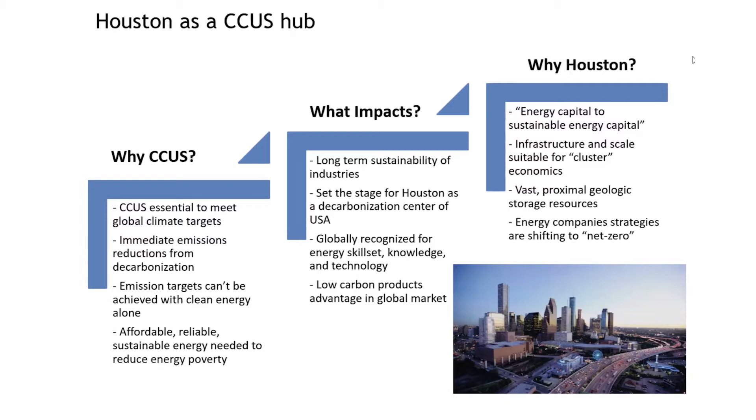So as we go forward, what were our objectives and findings? Well, we looked at a staged three-by-ten-year deployment: an activation phase, an expansion phase, and a broad deployment phase, looking at them in ten-year increments.

And we used the National Petroleum Council construct that has recently been put out to actually look at broad commercial deployment. We analyzed not only the emissions impact, but also the economic investment impact concurrently. And we're looking at CCUS optionality in terms of our geologic formations and what we have to offer in terms of enhanced oil recovery, storage, or both.

Our findings were such that the investment and risk hurdles really tell us that it will require strategic investment. It's going to require a mixture of enhanced oil recovery and pure storage in terms of our investment portfolio, but it affords us an opportunity to have a positive return at modest hurdles.

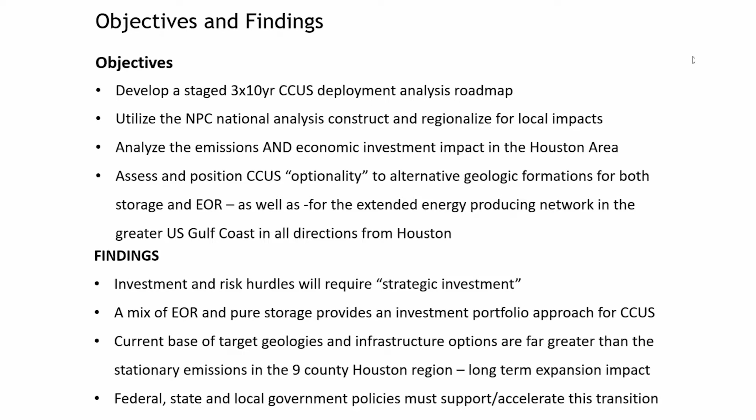And the current base of target geology and infrastructure here in Houston is far greater than our region. It impacts not only beyond into Louisiana and south and west of Houston, but also can be very important for our national program. As such, federal, state, and local government policies will be required to support this transition.

We looked at the three areas of capture, transportation, and storage, and we have challenges in all three areas, there's no doubt about it. But we also have the best position here in Houston to address all three: carbon capture in terms of leadership in world technology development, with entrepreneurs here in town driving forward every day, and pipelines, a way of life for us down here, as we continue to look at ways of building out our system.

And of course, storage, not only for enhanced oil recovery, but storage. We have vast reservoirs where we can be recognized globally as really unmatched in terms of storage capacities.

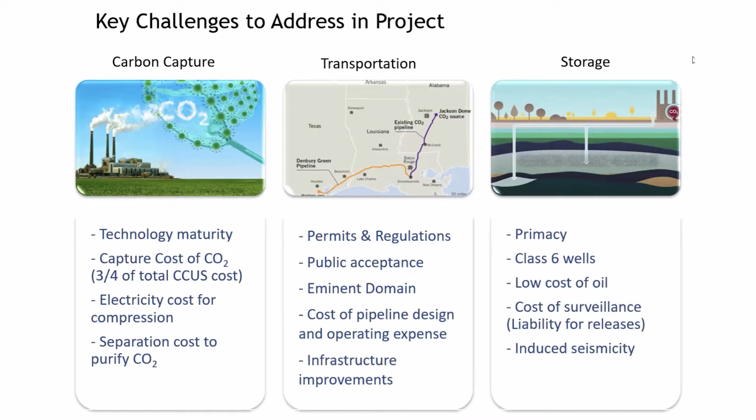As we looked at the Houston area, we looked at it in three phases: activation, expansion, and net zero. On the bottom axis, we looked at the individual processes where CO2 emissions were coming from. We looked at the low-hanging fruit in phase one, then expanded from steam methane reformer hydrogen production and natural gas combined cycle power plants, into industrial emissions and other process challenges, ultimately driving to emissions reductions across our region.

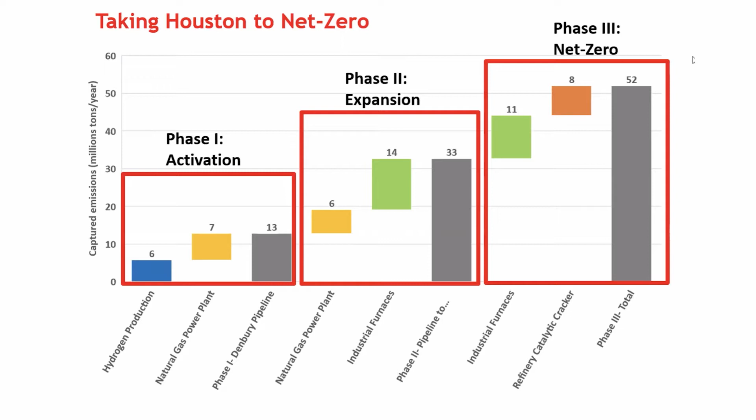But it's really not just our region, it goes beyond that. You'll see how we expanded these three phases in the next chart.

In the activation phase, steam methane reformers and natural gas power plants are located very close to the existing Denbury pipeline infrastructure. Hydrogen emissions were prioritized because steam methane reforming is the most cost-effective way of attacking emissions. Natural gas power plants are second on the list because of their proximity as well.

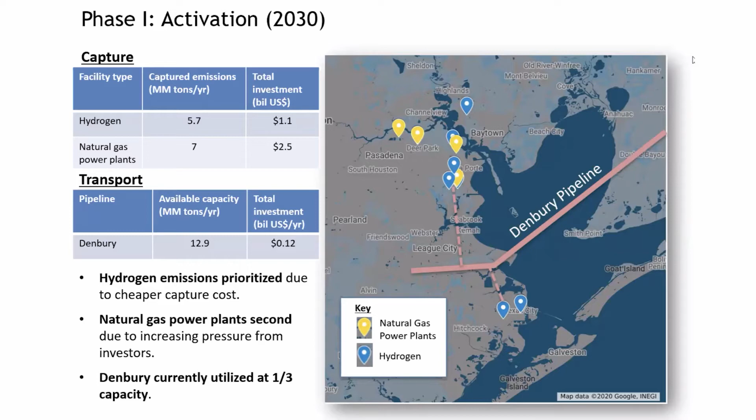The current Denbury pipeline is only at 1/3 capacity at this moment. So we have an opportunity to activate rapidly, installing capture facilities close to existing infrastructure, and having that infrastructure enable the first phase of our activities.

As you see on the next chart, the Denbury pipeline extends east into Louisiana, up into Mississippi, and along with the enhanced oil recovery targets already identified along that pipeline, we have a significant amount of not only EOR storage, but also saline storage.

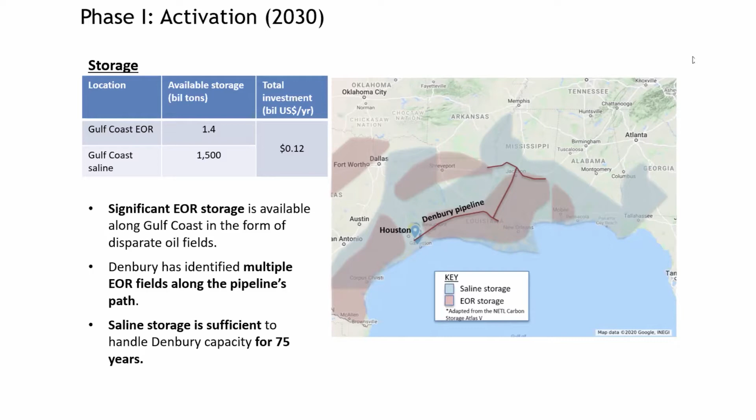So as we look at the ability to activate and move rapidly with capture installations, we can utilize this existing infrastructure and begin to move fast. We need to impact in terms of volumes, but also speed. The previous comment about winning slowly - this is our opportunity to win fast. That's why we focused on this activation phase.

We then modeled the activation phase, looking at it in terms of a 20-year cash flow analysis, looking at the NPVs and IRRs that would come from a project such as this. We used assumptions from the National Petroleum Council and the Gaffney-Cline work provided to us for regional gas and electricity costs and the cost of capture installation. We started with a baseline discounted cash rate of 12% on an all-equity basis as a starting point, which was what was done in the NPC study.

We looked at a multiple series of scenarios, starting with 100% enhanced oil recovery, moving to 100% saline, and then the optionalities created by having a portfolio of EOR and saline. We believe that looking at it this way gives us an understanding that the returns and the investments are all part of this analysis - it's not simply just gathering up the emissions.

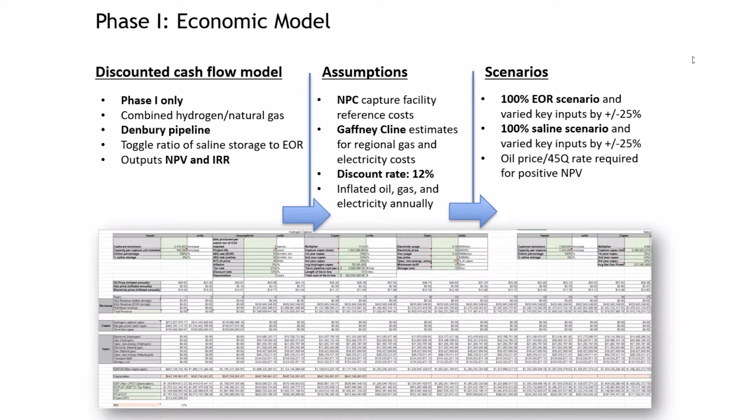From this model, we came up with key sensitivities in terms of oil price, oil recovery, and installed capital. We see that the project NPV can be positive today with enhanced oil recovery applications, but it hinges on the fact that oil stays at $40 a barrel. And that's a risk - that's part of the sensitivity analysis as well.

The oil price, the recovery factor, the natural gas, CapEx, and 45Q credits that go to the project - the beauty of the model is not the answer you get from one particular analysis, but the ability to take multiple variables, move them into this model, and create a future state and set of scenarios where investors can look at it. That's investors throughout the value chain of capture, transportation, and the geologic areas for enhanced oil recovery.

We're excited about this model because we think there'll be a lot of use for it going forward. It's not perfect, but it will set up a construct for us in our region to look at, and also for others outside our region to begin looking at how the geology and natural advantages we have in this region can be utilized - not just for the Houston economy, the state of Texas, the Gulf Coast, and really beyond that.

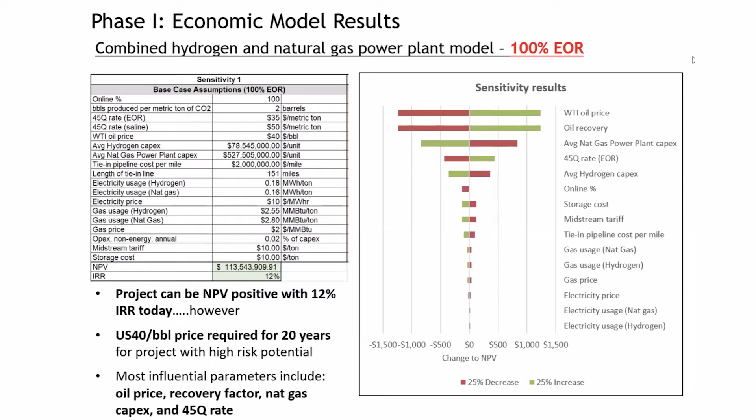So we've modeled a number of different other phases. Phase one, also we get into phase two where we expand beyond that initial phase one construct. We move into phase three where we, again, those three levels of capture.

But I guess the point here is that as we continue to expand, we're doing it with our eye on the future, not just for Houston, but creating that infrastructure long-term to serve the greater state of Texas and the Gulf Coast. We have unmatched geologic capacity in our region. We have unmatched capabilities in our region in terms of companies that are looking to decarbonize with capacity and capability, the scale and the wherewithal to do this, and a place to attract the knowledge and the understanding for us to be viewed as a global center for CCUS deployment.

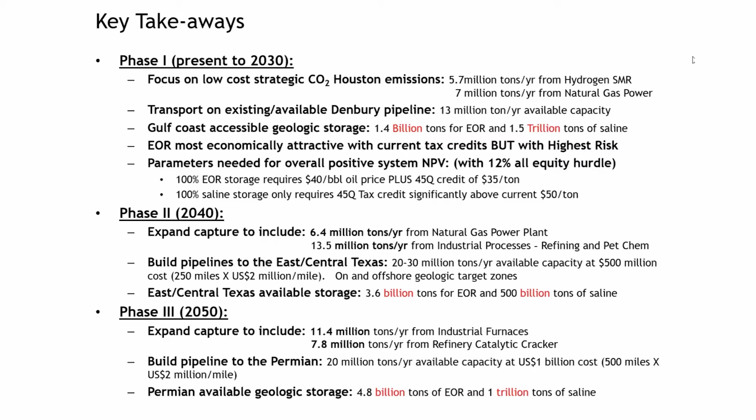Could not agree with the previous speaker more. If you can't do it in Houston, you can't do it anywhere. So we'd like to thank, again, the contributions from Jane Stricker from BP and Mike Godec from ARI and Steve Melzer out in the Permian Basin, Scott Nyquist, and also Nigel Jenvey, especially from Gaffney Cline. The Gaffney Cline cost model was fundamental, and the work that was done in the NPC study really creating the construct for all of our work.

So with that, let me hand it off to my colleagues, Andy Steinhubl, Greg Bean, and Ramanan Krishnamoorti, who will be presenting today. And so let me hand off to Andy and take it away. Well, thank you very much, Chuck.

Brett mentioned that today is National Hydrogen Day, and National Hydrogen Day was in fact established to raise awareness of the benefits of hydrogen. And I can't think of a better day to speak to Houston's potential to globalize our leadership in hydrogen. I'd like to recognize the students who are listed on this page who supported the case studies and modeling work, which I'll profile as part of the summary narrative, and then members of the KPMG team who also supported this work.

So if I unpack a bit the notion of globalizing hydrogen leadership in Houston, the market is expected to grow for hydrogen gas about tenfold per the Hydrogen Council by 2050. And if you include equipment associated with hydrogen, fuel cells, electrolysis, the market size by 2050 is anticipated to be $2.5 trillion. And that's being driven by the fact that many countries and regions pursuing decarbonization recognize the importance of hydrogen to decarbonize activities that are beyond the practical limits of electrification.

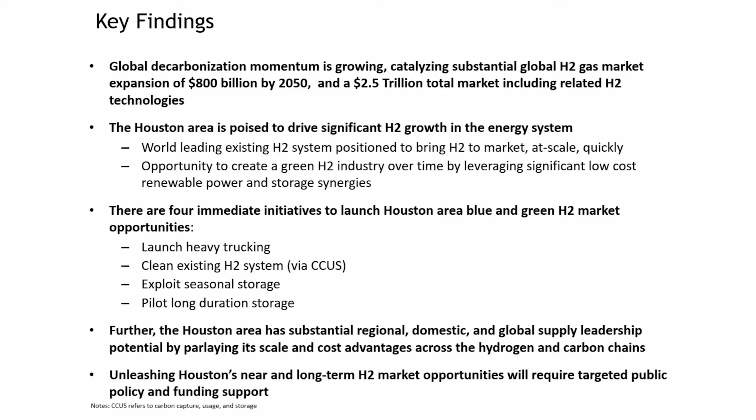So I mentioned on the far right in the starburst, the growth in hydrogen, which is projected to be about tenfold. And that'll be for hydrogen gas alone about a $1 trillion market. And in the upper right, that's being driven largely by decarbonization objectives to get to 2050 net zero. Many countries have established carbon fees or other incentives in order to drive it.

There are leverageable assets in many industrialized countries, existing hydrogen systems, the potential to scale CCUS, and then opportunities to use geologic storage and low power prices. Those are all things that are different depending on the country or region. And as we'll get into in a minute, Houston has robust capabilities in each of these areas.

In the lower right are technology and cost benefits that will affect all regions and all countries. So the shapes of these wedges, the gray, the blue, and the green, will all largely be regional and country specific, but the pattern of moving from gray to blue to green is fairly typical.

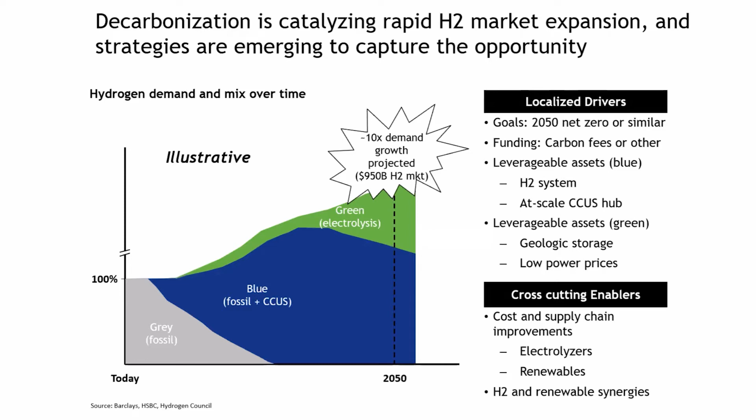To show you an example of that, I'd like to point out Rotterdam, which is interesting in that it's analogous to Houston in several ways. Today, it's a global refining balancing point and a refining manufacturing point. It also imports LNG, so you might think of it as a commodity hub, oil and gas commodity hub. Their ambition is to move to a hydrogen hub, a regional hydrogen hub. How are they doing it?

Up in the upper left, they've got a CCUS project underway, Porthos, which is going to take their existing SMR system and convert that hydrogen from gray to blue. And it moves into that pipeline system that you see running from left to right. They also plan on incubating a green chain.

Shell and BP both have wind-powered electrolysis projects on the books, and ultimately that hydrogen will also flow into that system and move throughout the Netherlands and across other portions of Europe. So the notion is pivot from commodity hub to hydrogen hub.

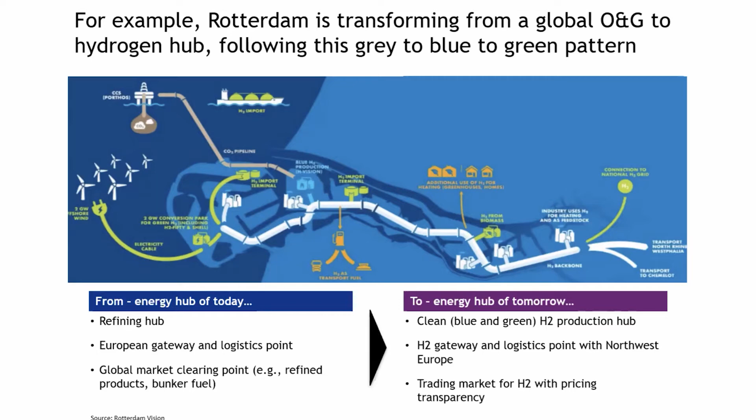So our project set out to customize that sort of gray to blue to green roadmap for Houston. And our approach was to look at analog studies, decarbonization strategies, regional strategies, look at projects across the value chain. Port of LA, for example, is piloting heavy trucking in the area around the port.

We did economic studies around specific areas of the chain relative to Houston, heavy trucking economics, the economics of electrolysis and storage, for example. And out of that, identified how Houston might activate a broader role in hydrogen, and then how it might ultimately scale to globalize our leadership in hydrogen.

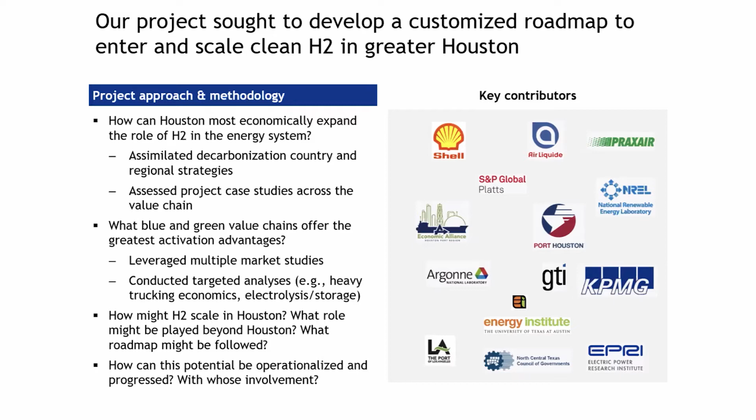So this chart, in my mind, is a bit of what's Rotterdam got that Houston doesn't have. I mentioned that Houston has a premier existing hydrogen system. We've got over 900 miles of pipelines, for example, which is over half of the pipelines in the United States. We produce 3.4 million metric tons annually, which is 8.5 times what Rotterdam produces.

We have 48 plants, and we have uniquely the world's largest storage caverns along the Gulf Coast, salt dome storage caverns. And you can see the extent of that hydrogen network on the map shown on the left. You might recall the map that Chuck showed around CCUS, which falls on the eastern portion of this hydrogen network, and therefore has the potential to activate CCUS around 8 hydrogen plants early on.

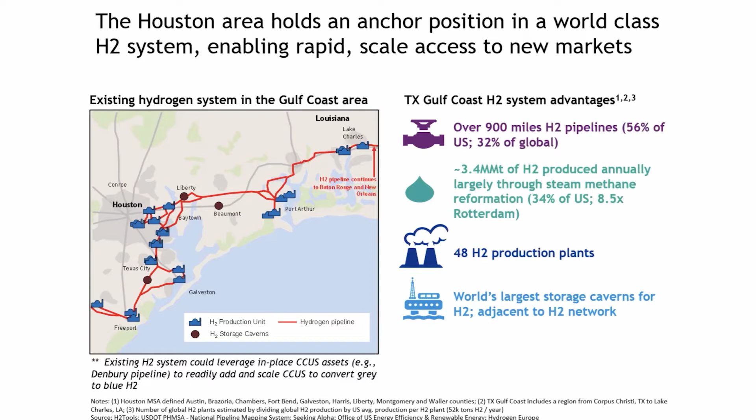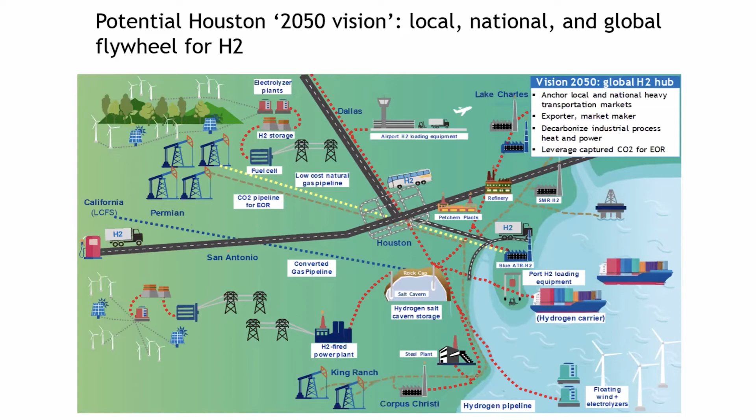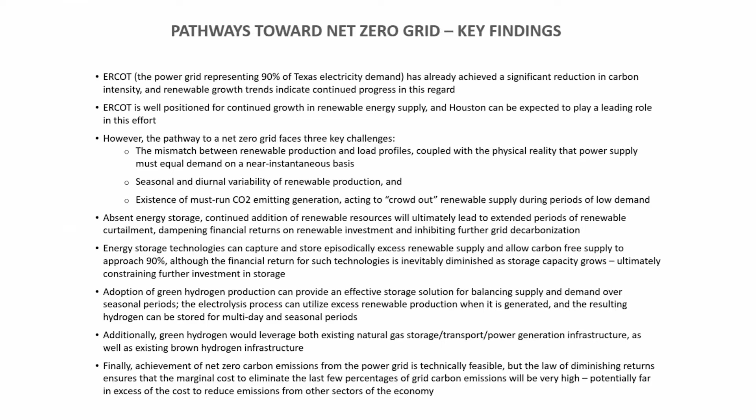Our work is focused on how energy storage can help and can capture and store that excess renewable supply and allow the carbon-free supply to approach 90%. We also look at the additions of green hydrogen production that can provide an effective storage solution for balancing longer-term supply and demand. And finally, I think it's important for us to recognize that while the achievement of zero carbon emissions from the power grid is technically feasible, the law of diminishing returns ensures that the marginal cost to eliminate the very last few percentages of grid carbon emissions will be very high. Next slide.

Texas is well positioned to expand renewables and energy storage and move towards a near zero carbon grid. We have top tier wind and solar resources. We have an independent grid in ERCOT. We have a large and well-functioning market. We have extensive infrastructure, both natural gas pipelines and transmission infrastructure, as several of my previous presenters have talked about. We have suitable salt storage that can be used for energy storage in the Gulf Coast as well as East Texas and Panhandle.

And Houston can really play a leading role in grid decarbonization. All the large global energy players are in Houston. Many of them are pivoting to green investments. We have a concentration of major renewable energy developers and owners. We're the headquarters to many large retail power companies, and we have a highly skilled workforce and a world-class brown hydrogen infrastructure grid, as Andy referred to. Next slide.

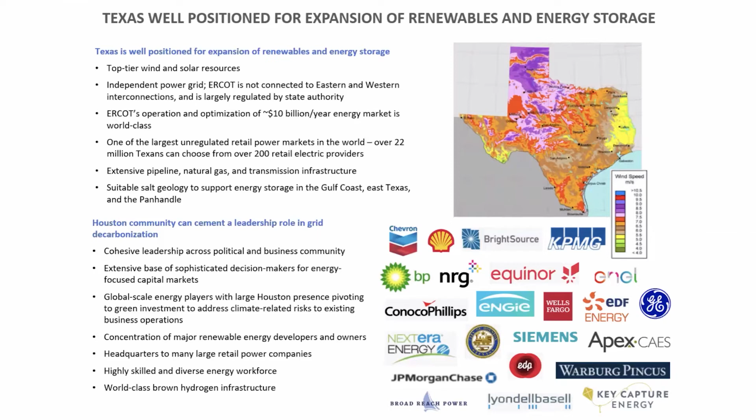So today, we mentioned Texas has already enjoyed robust renewable growth, which has resulted in declining CO2 emissions. Over the last 10 years, renewable penetration in the Texas grid has more than doubled. And as a result, the intensity of carbon emissions from the grid has declined by 30%. And we expect that progress to continue. Renewable resources are expected to dominate ERCOT supply additions for the foreseeable future due to declining costs, improved conversion efficiencies, and other incentives.

Ultimately, with renewable additions, both wind and solar collectively, at rates comparable to the additions that we expect to be made in 2020, we expect to be able to get close to a zero carbon energy grid by 2050. Next slide.

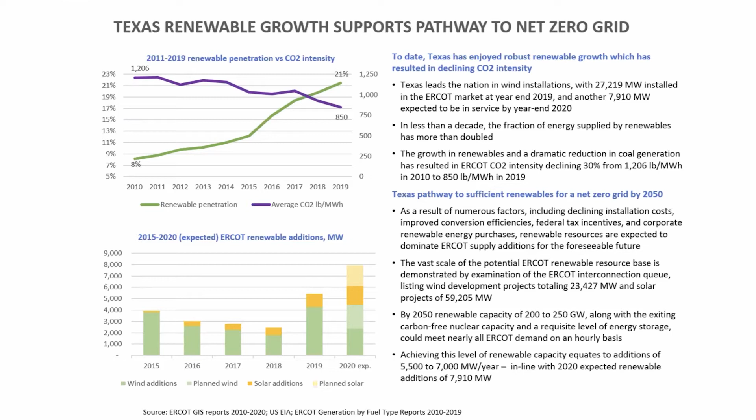However, without storage, the benefits of renewable additions plateau. As you see on this slide, which assumes wind and solar additions continue at expected 2020 levels for the next 30 years, we start to see diminished returns in the form of increased curtailment of those resources, starting in the 2030s and moving forward. We expect decreased interest from investors in renewable projects once projected curtailment levels get much beyond 15 to 20%. So we'll take that into account in our modeling going forward.

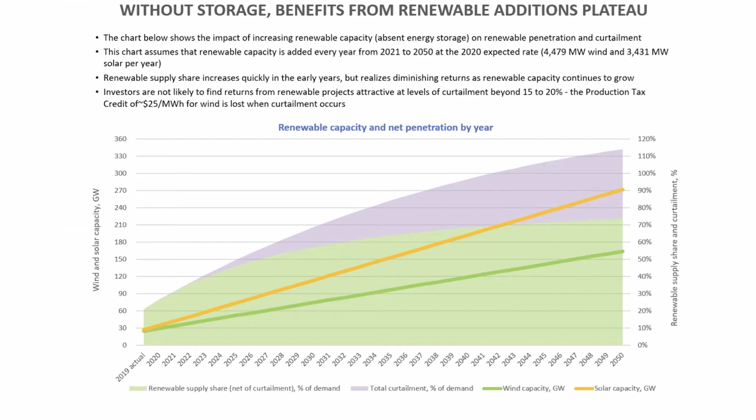Next slide. At the beginning, I mentioned three key challenges on the pathway to net zero. The first challenge is that renewable production is intermittent and varies across the time of day, months of the year, and across the years.

The figure on the right illustrates the challenge faced over the course of a day. As you can see, renewable production, the combination of wind and solar, varies significantly over the course of the day, and the periods of peak renewable production do not coincide with the periods of peak load. As a result, some renewable generation needs to be curtailed, and we will require increased thermal generation to meet those peak requirements. So that's on a daily basis.

Renewable production patterns don't align particularly well with the ERCOT load, as we mentioned, especially wind. So we do get significant over and under supply.

Third, we have a level of must-run production. Those are nuclear units, cogeneration units, minimum output from any coal assets online, and units that provide ancillary services. Those tend to crowd out renewables at peak times, and as a result, increase curtailment. We will talk a little bit about how we can make some adjustments to that must-run generation to further help decarbonize the grid.

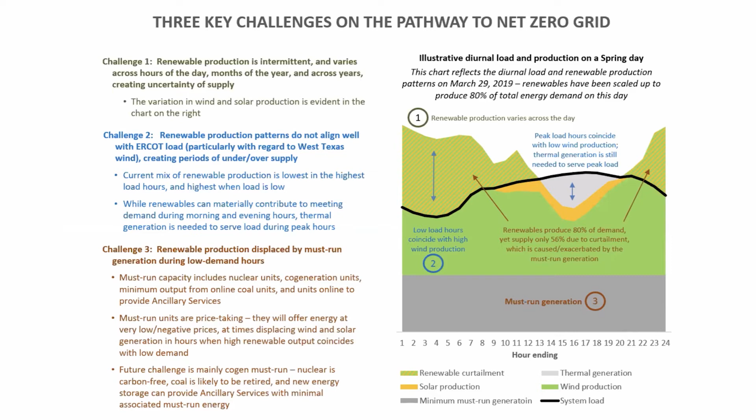Next slide. So just a couple of points on our methodology. In terms of the key assumptions in the middle on the right, we took the 2019 ERCOT load pattern by hour, and grew that by 1.7% per year over the next 30 years.

In addition, we added some electric vehicle demand in 2050, at a level of over 3 million megawatt hours. We assumed a carbon price that varies in order to keep the realized prices for renewables, particularly solar, at a minimum of about $25 a megawatt hour, which has been the level of recent PPAs, and would, we believe, provide an incentive for continued investment in those resources.

We do assume that today's coal-fired capacity is retired by 2050, and then we add gas generation capacity as needed. In terms of things not in scope, we did not include any demand-side solutions or adjustments. We did not include any additional electrification that might result from decarbonizing other sectors beyond the electric vehicles mentioned. And we did not assume any increases in renewable or energy storage performance or cost.

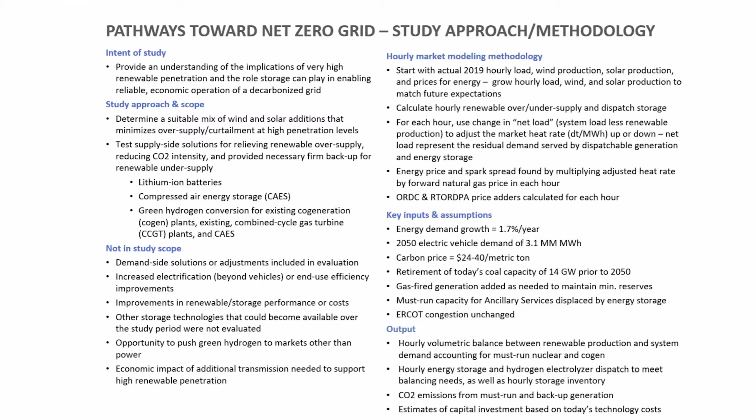Next slide. So curtailment and renewable penetration vary with the mix of wind and solar. We're fortunate that we have both, but that mix cannot completely eliminate oversupply.

In order to look at storage options to help us get close to a net zero carbon grid, we had to identify a base case that we could then use to compare different storage options. So what we did was, using the 2050 demand profile I mentioned, we took that demand level, and after subtracting off the nuclear generation expected in 2050, we then calculated how much wind and solar generation capacity would be required in an unconstrained environment to give us a starting point.

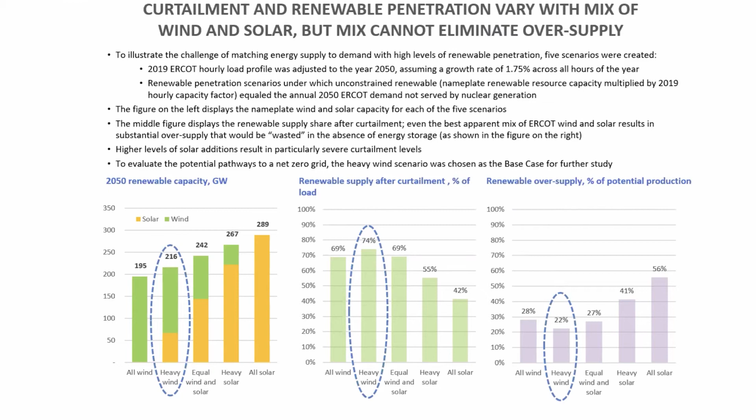Next slide. This is just a quick look at some of the details of that base case, again without storage. You see the significant daily occurrences of under and oversupply, which causes curtailment.

In the middle, you see the seasonal imbalances where we have oversupply in most periods, especially in the spring, and then of course undersupply in the high peak demand periods of the summer. The graph on the right is oversupply and undersupply by hour for the over 8,000 hours during the course of 2050. You can actually see that oversupply is larger than undersupply, and that's basically due to the must-run recovery or the must-run capacity that we have.

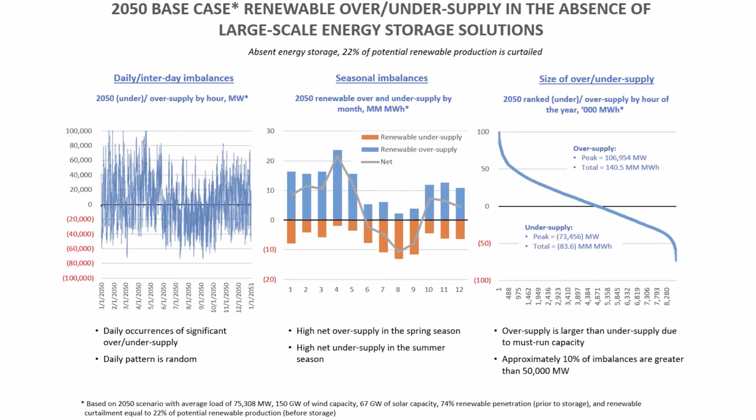Next slide. So now starting with that base case, we then looked at several technology solutions that would allow us to increase the renewable penetration and reduce curtailment. We looked at several. They're listed on the left-hand side of this.

First, we looked at lithium-ion batteries, and we looked at those that would have a storage duration of up to 4 hours. We looked at compressed air energy storage, which would have a potential duration of up to 48 hours. And then we looked at how we might make modifications to using hydrogen to further decarbonize the grid.

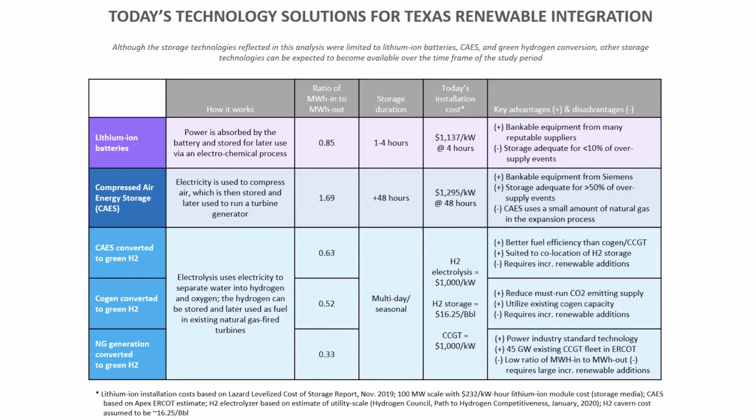We looked at converting the natural gas that's used in compressed air energy storage to green hydrogen. We looked at converting the must-run cogen to green hydrogen burning, and then looked at converting the thermal generation, the natural gas generation, to green hydrogen as well. So those are the 5 storage scenarios that you'll see on the next page.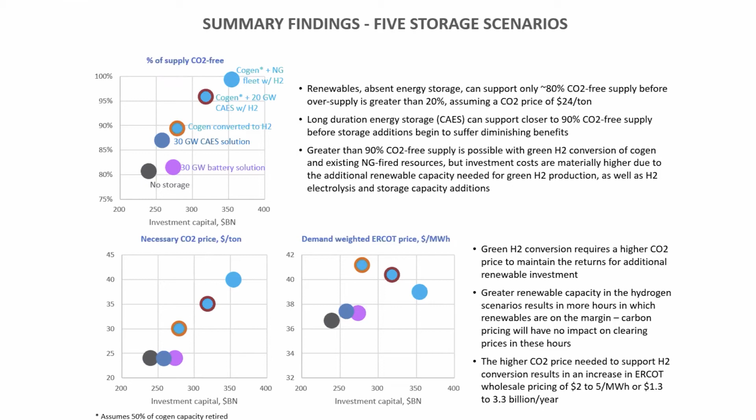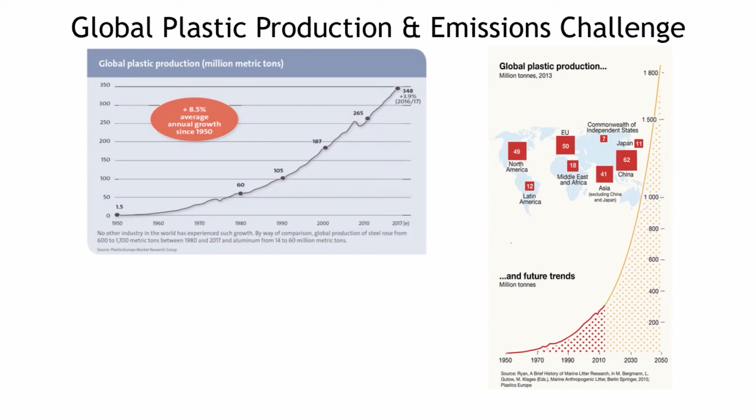If we go with a slightly more conservative estimate of about 4% growth, we end up at about 1,000 megatons of plastics being used. This will result in a substantial increase in greenhouse gas emissions worldwide, getting to about 6% of global greenhouse gases being emitted coming from the plastics life cycle alone.

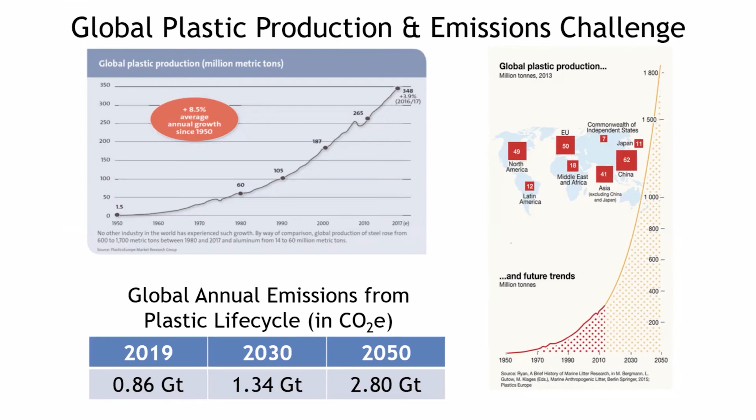A second big challenge with big plastic production is marine pollution.

We'll talk about this in the context of Houston and why we think Houston can lead this effort in the circular plastics economy. Houston MSA dominates plastic resin production. About 50% of polypropylene, polyethylene, and polyvinyl chloride, which contribute about close to 70% of all plastics manufactured, are made in the greater Houston MSA, and that really is a huge amount of plastics being manufactured, not just for domestic consumption, but also for export.

This plastics manufacturing, this resin manufacturing, supports over 10,000 jobs and results in about 30 million metric tons of CO2 equivalent being put out into the environment.

In addition to this steel in the ground for the making of the resins, the other big part of why Houston can lead in this circular economy is because we have some of the largest waste management and plastics recycling companies in the MSA. And perhaps differently from any other ecosystem in the country, most of the plastic waste generated in the greater Houston MSA comes from commercial and industrial waste producers.

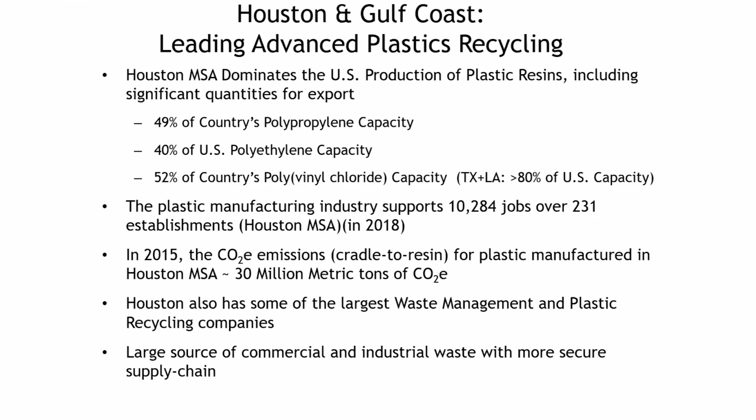They contribute about 70% of all plastics waste generated, coming from the commercial and industrial sector, rather than the residential sector, which dominates other areas.

So if we go to the next slide, we can talk about the global circular economy and where Houston is different, and where we can really find a place to make a difference in how the circular economy is going to get redefined.

The fundamental way in which most of the world deals with recycling, currently at a very low factor of say 15% of all plastics being recycled, is through a process called mechanical recycling. You simply collect the plastics, grind them up, and repurpose them for park benches. Unfortunately, there are only so many park benches you can make out of these plastics. And so we think Houston can lead in an area called chemical recycling, or advanced recycling.

This is taking these plastics back to where they started, back to fundamental molecules from which you can remake plastics back at high quality and high value products. That is really the focus of what we look at.

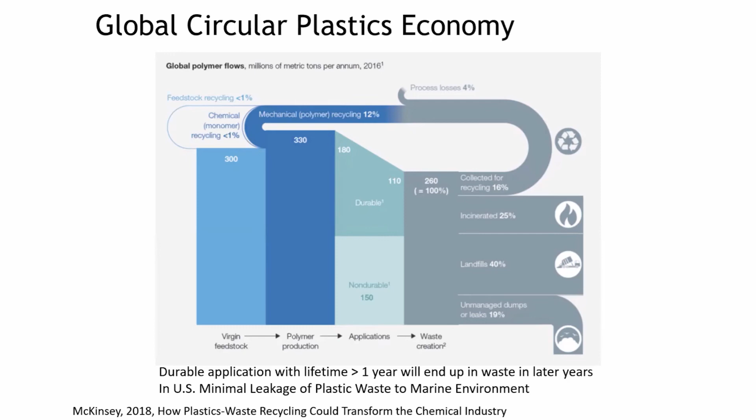One of the differences between the global circular plastics economy and the US is there is minimal leakage of plastic waste in the US ecosystem into the ocean or marine environment. That really plays a big role because we can focus on the collection, sorting, and repurposing of those plastics.

So if you go to the next slide, I want to talk about why Houston, and the findings and objectives of our work. We want to focus on two goals. The first comes from the American Chemistry Council, which has put forward the notion that single-use plastics, which represent about 35 to 40% of all plastics used, need to be fully recycled by 2030, or 100% recycling by 2030, and that would eliminate a lot of the littering and improper management of that waste.

The second objective for us is to get to 100% of all plastic waste being recycled, reused, or repurposed. These would result in a 90% reduction in greenhouse gas impact, and this is something we believe can be achieved by 2050.

One of the reasons we believe Houston has a unique advantage here is because of what I mentioned before: a lot of steel in the ground for the manufacturing of plastics resins, and a workforce that is ready to take charge and build on that infrastructure. A second factor is the unique aspect of our commercial and industrial waste segments in driving the ability to recycle.

A third factor, and this is what my colleagues have already alluded to, is the growth of renewable energy. If we simply took renewable energy and used that for the manufacturing of all plastics and for all recycling purposes, for the energy needs we would immediately get a decrease of 50% of the greenhouse gas emissions that the plastics industry puts out.

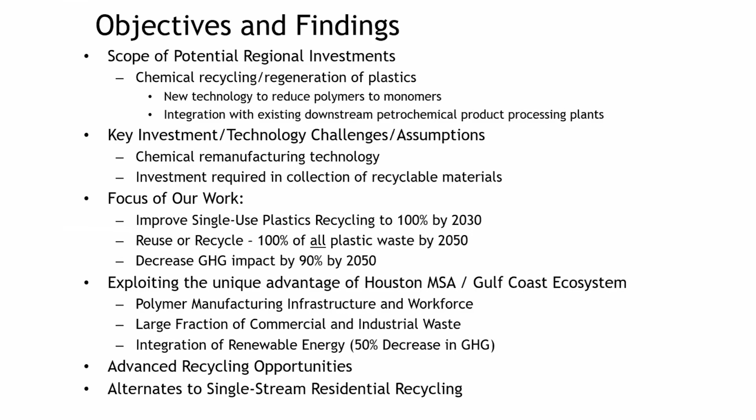So we're going to talk about a couple things that are going to make a difference in terms of where Houston goes. We did a detailed study on 7 categories of plastics - different types of polyethylene, polypropylene, polyvinyl chloride, polystyrene, PET. We looked at their end uses, and the end use matters.

If we go for packaging applications, that plastic goes from formation, from a monomer to pellet to waste within half a year. If I make it such that this plastic is used for foams that go into buildings, that plastic stays in the environment from the time it's made - monomer to waste - over a 35-year lifespan. So different applications have different implications in terms of what happens to the waste stream.

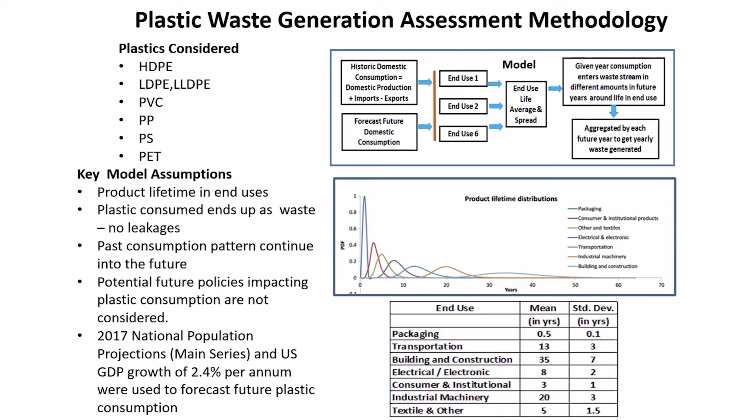That really drives a lot of our process. We used a detailed model at the US level and then brought it down to the Houston MSA. We've got results to show you on the next slide that talk about what the total plastic waste generation is going to be, starting from 2000 and 2010. We've been able to validate that data.

And where is this plastic waste going to come from? Packaging is going to play a big role. Transportation is going to play a big role. Consumer products are going to play a big role. And perhaps most interestingly, building and construction is going to play a big role in generation of the plastic waste.

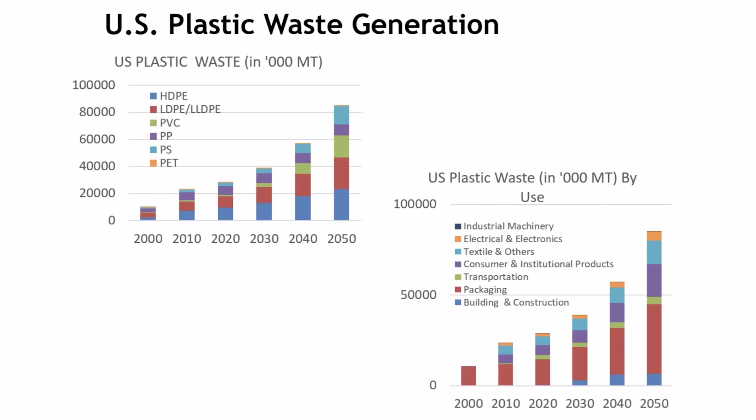When I translate this to the Houston MSA, we are currently at about 0.6 million metric tons of plastic waste being generated in the Houston MSA. We expect that to grow by a factor of 4 over the next 30 years to about 2.4 million metric tons.

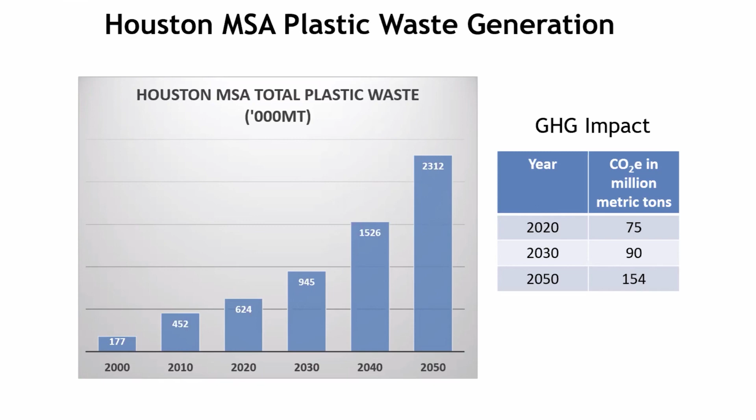The greenhouse gas impact today, from cradle to grave, is about 75 million metric tons for plastic being generated all the way to waste. By 2050, we expect that to double to 154 million metric tons unless we do something about it. This is where we've cast a scenario that allows us to come back and say, what are the options for Houston?

We anticipate by addressing 100% of all single-use plastics and getting all plastics recycling to be greater than 40% by 2030, we have the ability to reduce greenhouse gas emissions by 10 million metric tons, put steel in the ground for 100 advanced recycling facilities. These are chemical and solvolysis-based recycling facilities that will take it back to monomer, each handling about 25,000 tons per year, with a total investment of about $3.5 billion, creating 15,000 new jobs, and saving over 5,000 jobs directly associated with plastics resin.

The immediate actions needed are not necessarily technology. Chevron Phillips just demonstrated today that this can be done. What is a major bottleneck? The major bottleneck is improved collection and sorting. We believe that if we can replicate the extended producer responsibility agreement that exists in Europe, it can fundamentally change our ability to collect and recycle plastics waste.

Especially single-use plastics waste, in a much more responsible way. Education and behavioral changes are a big option and an opportunity. And lastly, identifying and building that supply chain of recycling industrial and commercial waste, I think, is a great opportunity for the greater Houston area.

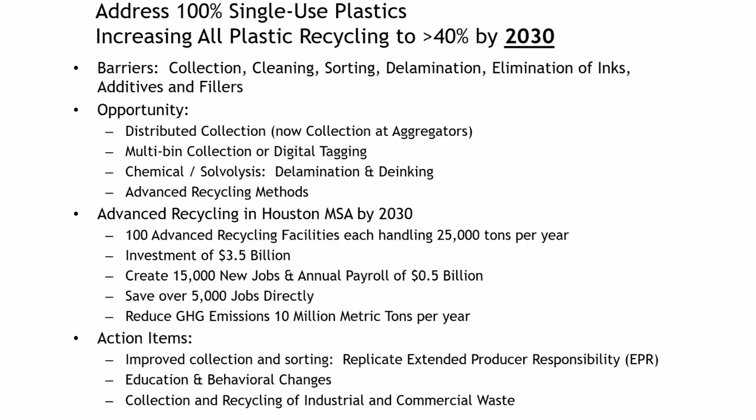By 2050, we anticipate going to 100% recycling. We believe this will result in about 135 million metric tons of greenhouse gas emissions being prevented. It will result in about 300 advanced recycling facilities and a threefold growth in mechanical recycling facilities in the greater Houston area. Our focus will be on improving recycling of things such as polypropylene, polystyrene, and linear low-density polyethylene. This will bring in an investment of about $15 billion, create 50,000 new jobs with an annual payroll of about $1.8 billion, and save 10,000 jobs directly with plastic resin manufacturing.

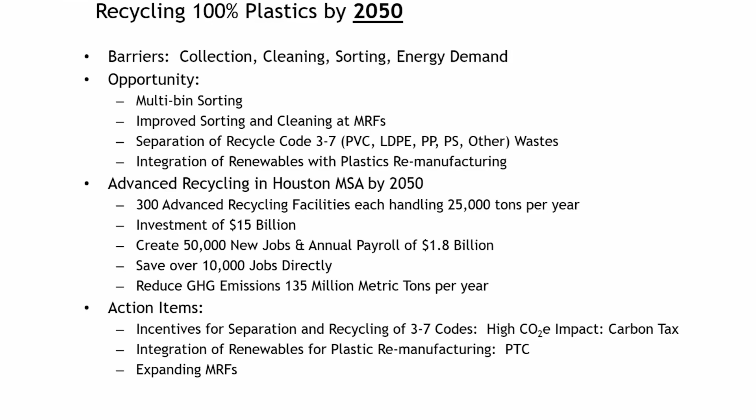One key action item that must be addressed is the separation and recycling of plastics such as PVC, LDPE, polypropylene, and polystyrene. These have a much higher CO2 impact and perhaps can be advantaged by something such as a carbon tax. Integration of renewables can result in a fundamental shift in the greenhouse gas impact of plastics manufacturing, so extending PTC credit for renewables exclusively associated with plastics remanufacturing can be a fundamental driver for that integration process. And the last one is really an expansion of the MRFs that must happen with speed for us to be able to identify and grow.